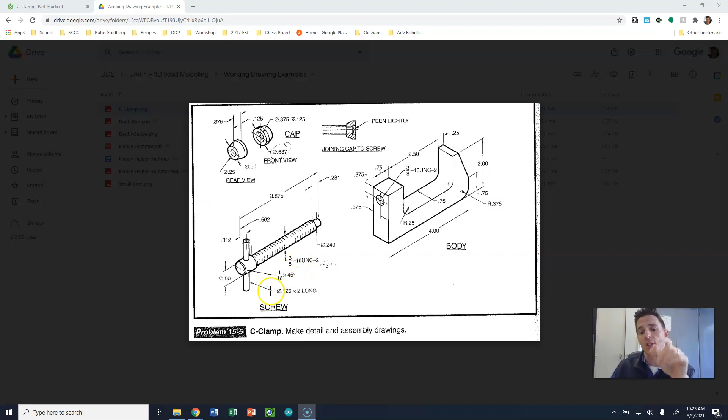Then next to that there's a dash, and in this case it says 16 UNC. So 16 stands for how many threads per inch. If I was to cut 1 inch of a 3/8-16 bolt and count the threads, I would have exactly 16 threads for that inch. If I were to cut half of an inch of that bolt, then I would have exactly 8 threads because it's half of the 16. UNC stands for Unified Coarse Thread, which is a standard of threads. There's also a UNF, which stands for Unified Fine Thread.

Alright, so here's a chart of different threads. Again, we either have a Unified Coarse Thread or a Unified Fine Thread. So let's find the 3/8 and talk about the differences. We have our unified coarse thread 3/8-16, which is exactly what we're using in our activity, and then we have a 3/8-24 unified fine thread. Both of these have a basic major diameter of 0.375 or 3/8 of an inch. But the main difference is that there are 24 threads per inch in a unified fine, while there are 16 threads in a unified coarse.

So when we're talking about bolts, the coarser the thread is, the thicker that thread is, and the stronger the thread is. But when we're going through thin materials with a nut, we really want at least 4 full revolutions of threads into that nut in order to get a good, strong connection. So if we have thin materials, then we need to use fine threads to get enough rotations within that distance.

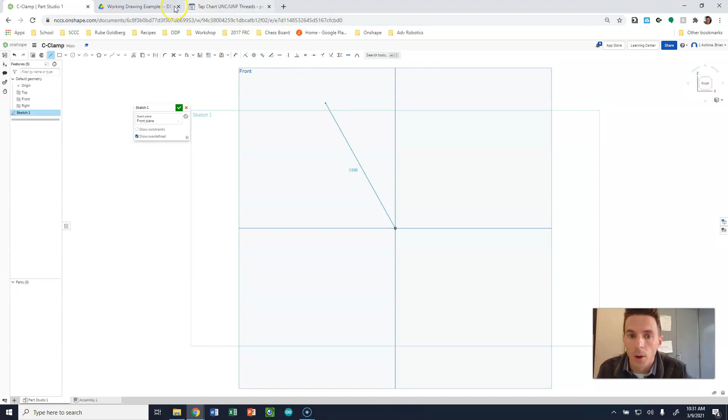So I'm going to create these screws using the Revolve command. The overall thickness of this thing is 1/2 inch, so from the center point up it's 1/4 of an inch. Down here again is 3/8, that's its major diameter, so half of 3/8 is 3/16. And then lastly down here it's 0.24, half of that is going to be 0.12.

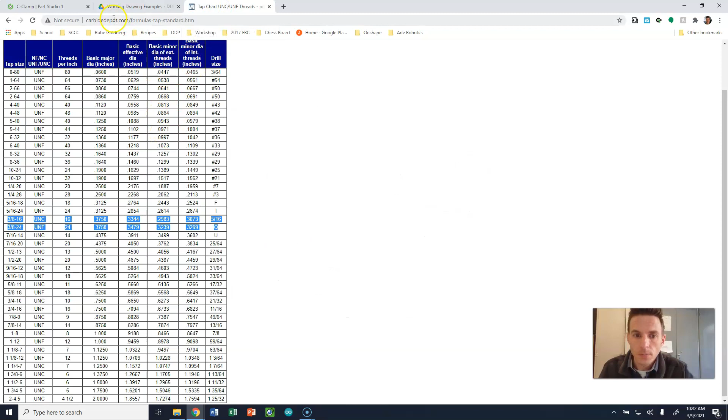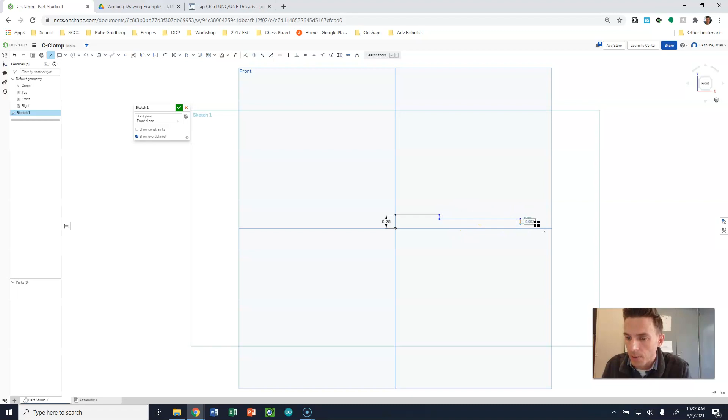So when I start creating my drawing, I'm going to come up 0.25. I don't know how far over I'm going to come, so it won't really matter yet. I'm going to draw a drop down, a piece here, another small drop down. I'm going to come out perpendicular, come back to the center point, and here. Remember, I'm starting on my origin.

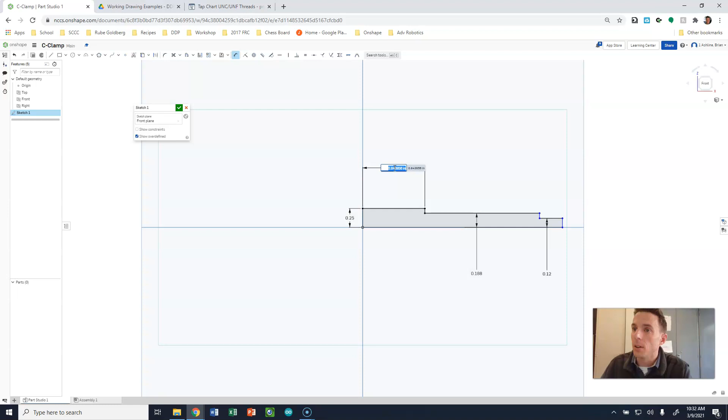So again, the thickness between here and here is half of 3/8, which is 3/16. And then the distance between here and here is 0.12. The length of the back of this handle is 0.562.

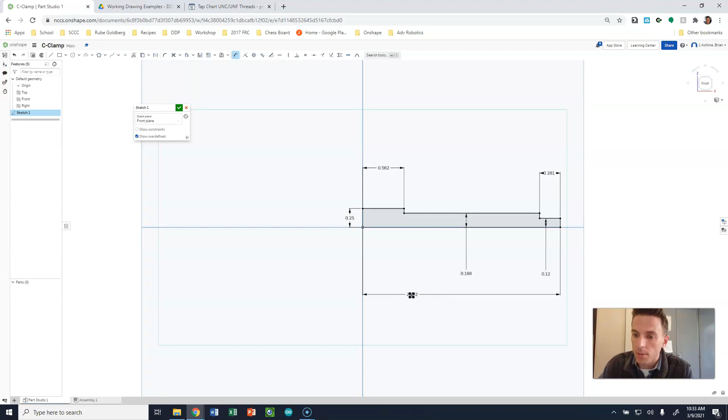The length at the end here is 0.281. And then the overall length of this object is 3.875. Okay. So again, the length dimensions don't change. It's just your height dimensions that change, and they're cut in half.

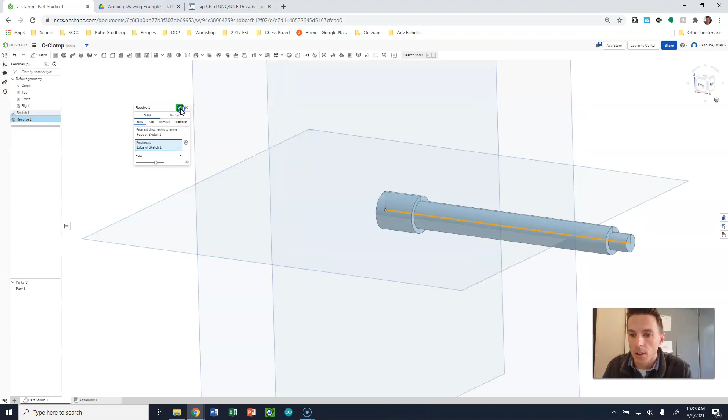So when we go to revolve this, we want to revolve our object around this axis, and that's going to start making the object.

Okay, so let's add the thread representation to this object. This is a part of this program that's not my favorite, but it's not too bad either. We just need to find some information out. Specifically, we need to know how long this plane is, which is what we want to put the threads around. Remember, we're going to have 16 threads for every inch that this thing is long.

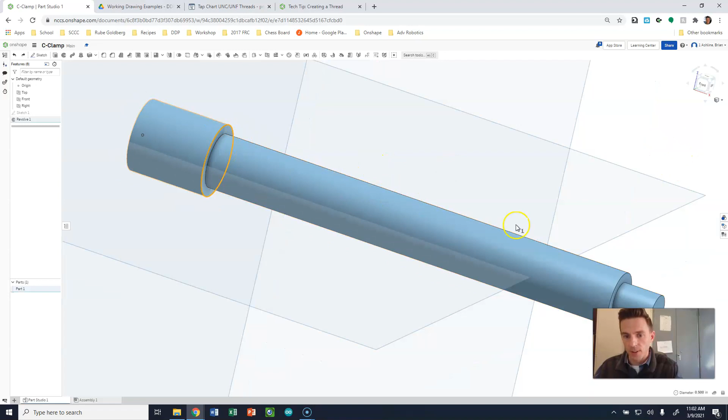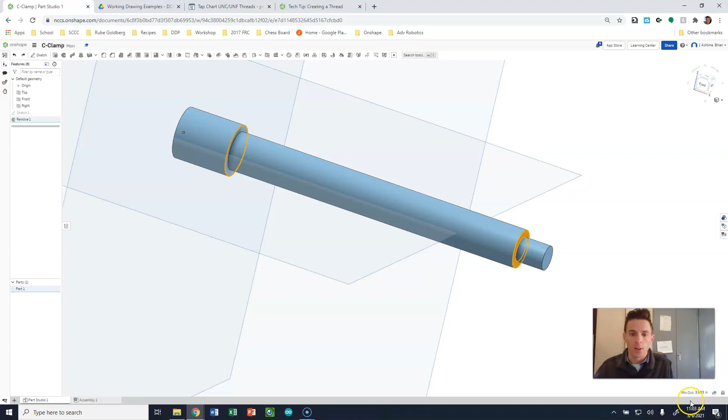Okay? So without being on any sort of tools, if I click first on this surface here, and I click second on that surface there, or vice versa, it does not matter, it tells me in the bottom right corner, way down here, that distance there is 3.0325, or 3.033, okay? So I need to know that number, 3.033, and now I'm going to select my Helix, which is this button up here.

So it asks me what type of face I want to go around, and I want to go around this face. And then it asks me if I want it clockwise or counterclockwise. Threads typically go clockwise, so we're going to leave it at that. And then it asks me how many revolutions we have. So remember, we need 16 threads per inch, so I'm going to type in 16.

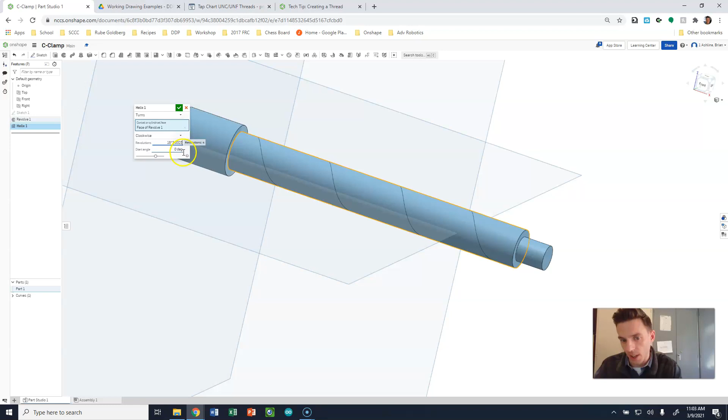Then I'm going to hit the asterisk sign, which is the sign above the 8. That's the multiplication sign on a computer. So 16 asterisk 3.0325 is technically the length of this object, or 3.033 is fine as well. And basically this will do the math for us, multiply 16 times 3 and a 32nd. And when I click the checkbox, it will put a thread around the entire piece here. Okay, so that's creating our threads.

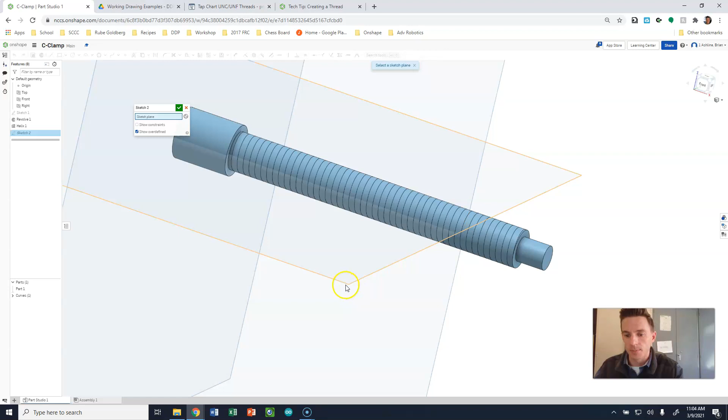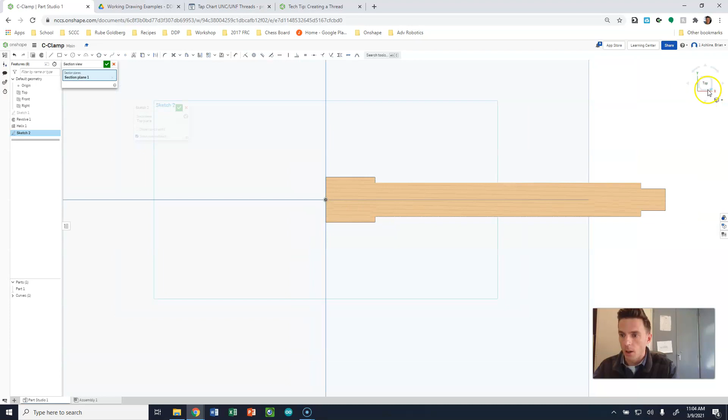Actually there are two more things we need to do in here. We need to put our handle and we need to put a chamfer. So let's talk about creating the handle next. The handle we're going to sketch, and I'm going to do this on my top plane. Okay, so I've created this sketch in the middle, and again we can slice our graphic by saying section view and then selecting where we want to section the piece. So I'm drawing right in the middle of this object vertically. When I look at this from an isometric view, you can see that half of it is seen below, half of it is hidden above.

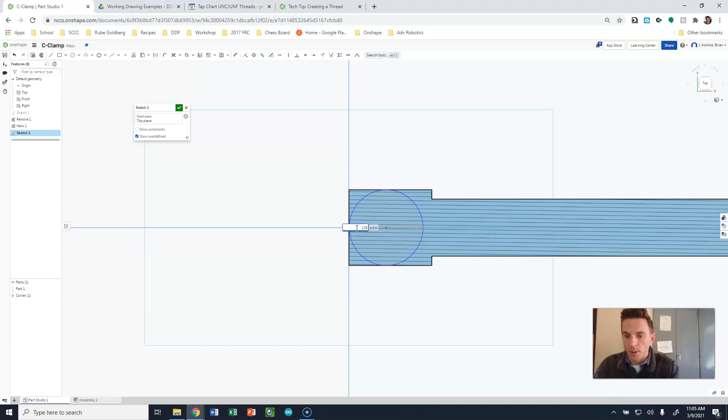So for this part here, we're going to come to the circle. I'm going to drop this circle in here. And this hole is 0.25. No, not 0.5. 0.25. Okay. And I want this thing located horizontally, in my case, with the origin. And then I need to tell it how far away it is from the edge. So let's dimension from here to here.

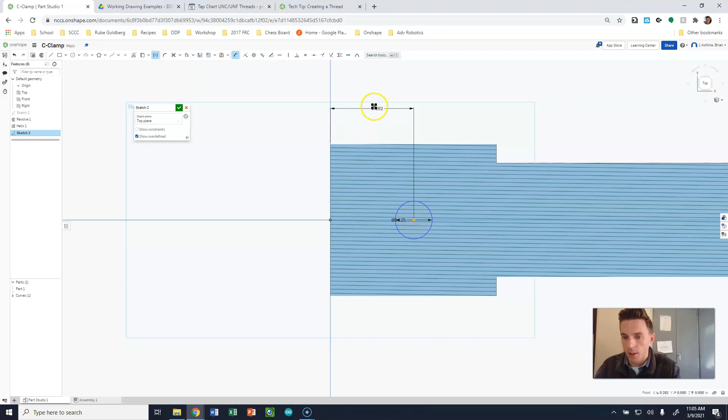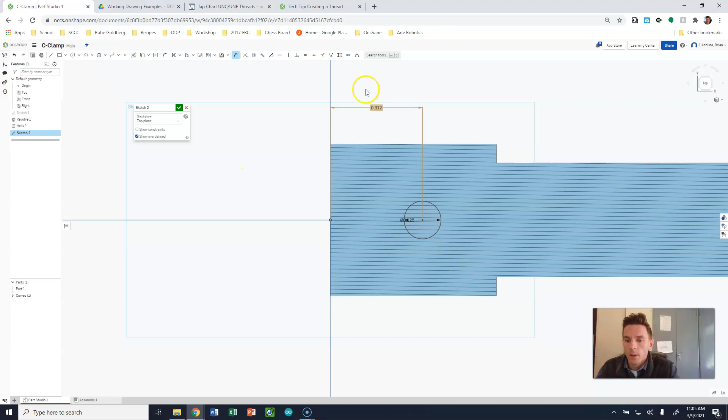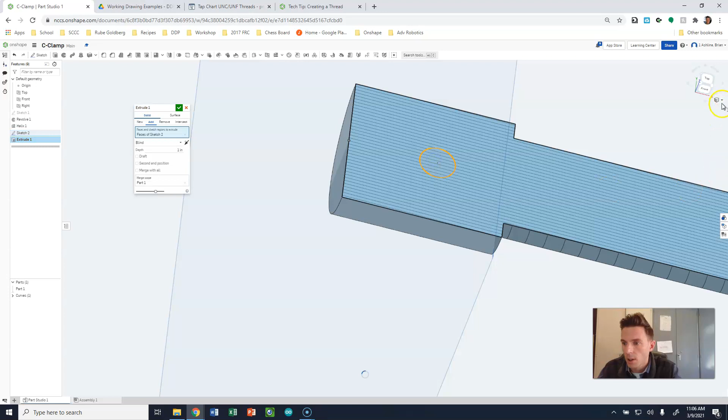Let's take a look at what that is. According to this drawing here, it's 0.312 from the edge. So 0.312. Yeah, see, it's right there, 0.312 from the ends. So 0.312, I'm going to click the checkbox, and I'm going to hit Shift E. This isn't a hole, it's going to be an object that gets pushed out. So I want my sketch 2 to be the thing that gets extruded. I can turn off my section view so I can see this happening.

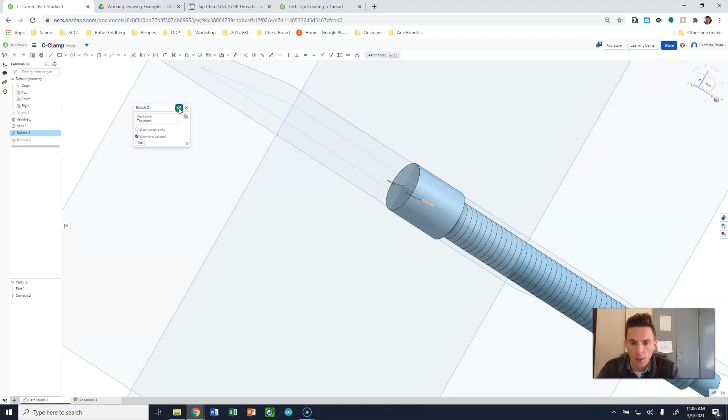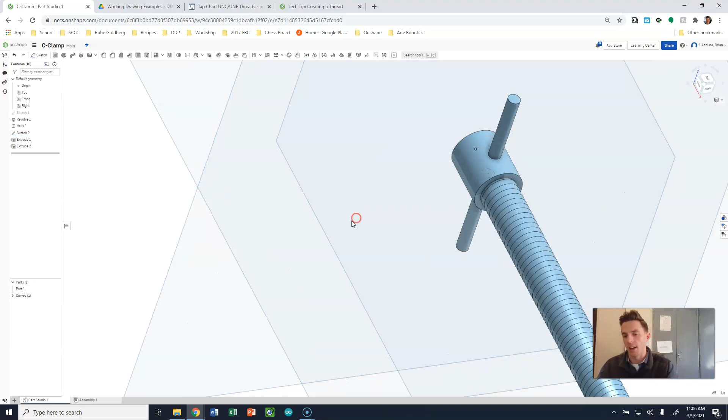We need it to go in both directions ultimately. So we can have it come up 1 inch and we'll leave it there. We're going to create a new extrusion based on sketch 2 again. So let me turn the visibility on for that. We're going to say Shift E again. Select sketch 2 again, except instead of having it come up, I'm going to have it come down. And all of this is in the same part. It all gets added together. So at this point, all of these can get turned off.

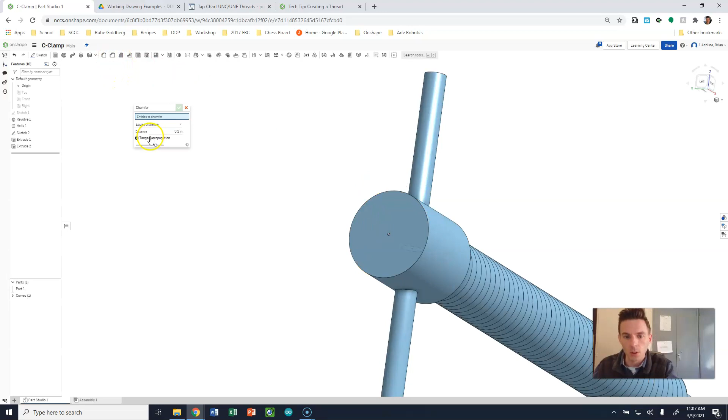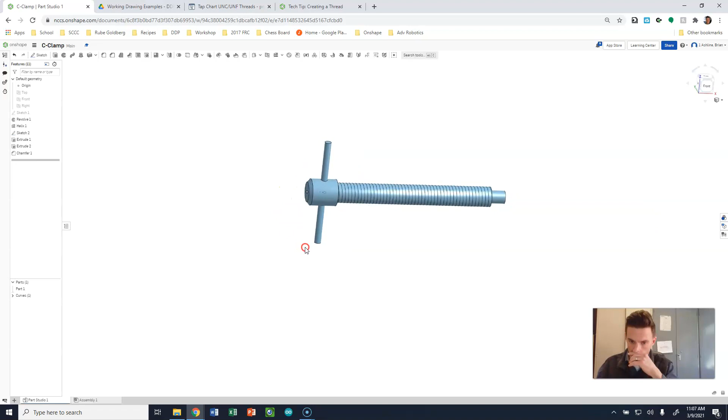The very last thing that we need on this drawing is a small chamfer, which is a 1/16 of an inch chamfer by 45 degrees, which means that it's the same distance in both directions. So we're going to come back up to our chamfer tool. We said that the distance is 1/16. It's equal distance. Click on that surface. 0.06. Yep, I guess that is right. And then there's my chamfer right there. Okay. So that's creating the threads on the handle.

I'll create a new video to show you guys how to create the threads in the body.